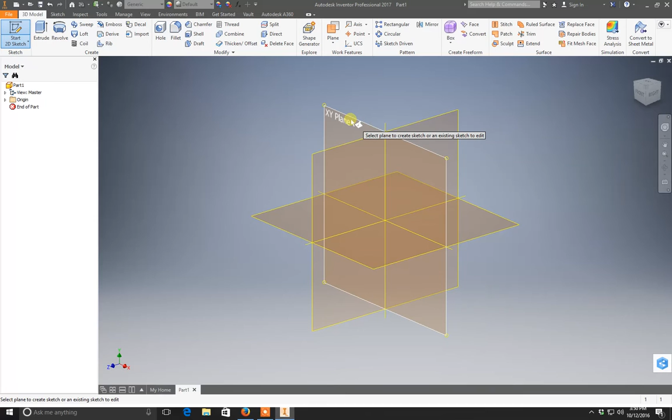Alrighty. So hopefully most everything should be basically the same in this version as your version. This is Inventor 2017. But we start by clicking 2D Sketch up here. We click on which face we want to draw on. We'll click the front face or the XY plane. So we click on that, and we can see from this box over here that we are now facing this plane.

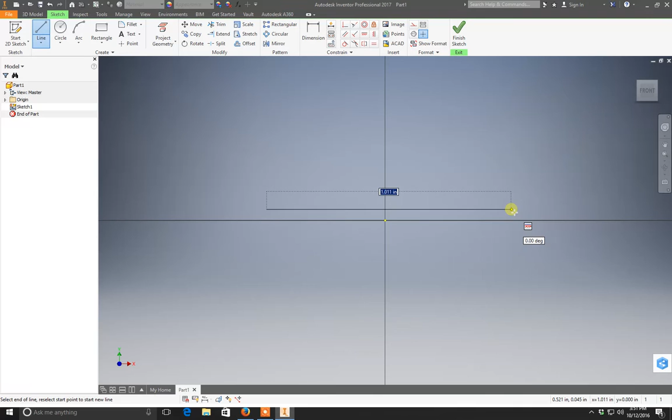Now, how this program might differ from how you would draw a part in AutoCAD or Mastercam is usually it's easiest to just draw the part quickly without having any regard to having the dimensions correct or anything. So this base mount for a shaft looks something like this. Now this isn't exact, and I don't really care too much about being exact. Just that it has the basic shape of what I'm going for.

So if we click F8, we can look at the constraints that Inventor has decided to place here for us, kind of just based off of how we drew it. So the middle point is fixed, and that's always going to be there. This baseline right here has a horizontal constraint, so we know it's going to be horizontal, and this line is parallel to this line.

This line is perpendicular, as we can see here. This line's perpendicular to that line. These two lines don't have any constraints besides the coincident constraints that are shown by these yellow square dot type things. Another perpendicular constraint here. So I click F9 to turn those back off.

First thing I'm going to do is constrain the middle of this line to this point right here. It's kind of to set up some symmetry. So I click on the coincident constraint right there. I go to the middle of this line, find where it has that green point, click there, then click on that point, and it moved the center of that line to my origin, which is where I wanted it.

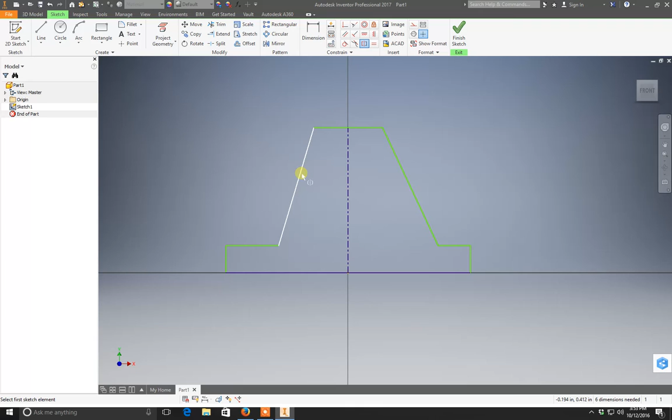One more thing, we will click on the symmetry constraint right here. You click on the two objects you want to be symmetrical first, and then you click on the center line to make them symmetrical. We could keep constraining these other lines to be symmetric, but I believe that based off of these two lines being constrained to the middle and these lines being symmetric, everything else should be already symmetric.

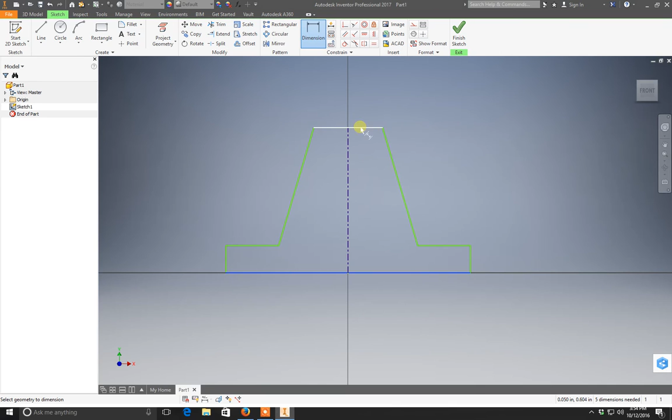So the next thing we'll do is start adding in some dimensions. So first, the overall height of this thing is 1 3/4 inches, so 1.75. And you'll see as I enter that first dimension in that it scaled the entire thing. Next thing we'll do is right here, that is 1/4 inch.

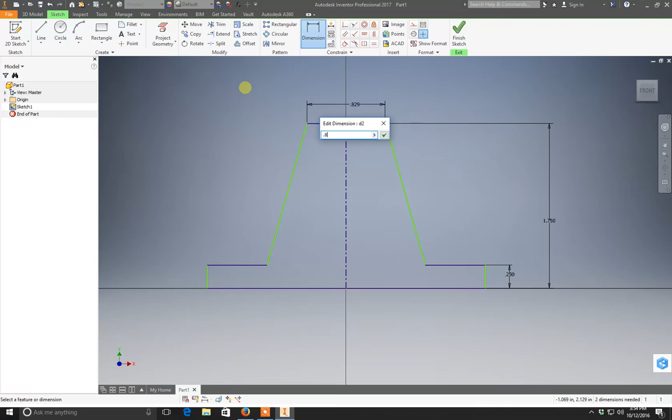And then I'll constrain these 2 points right here. So these are the points that I measured when drawing this thing initially. So this one is 0.875, and between these 2 points is 2.5.

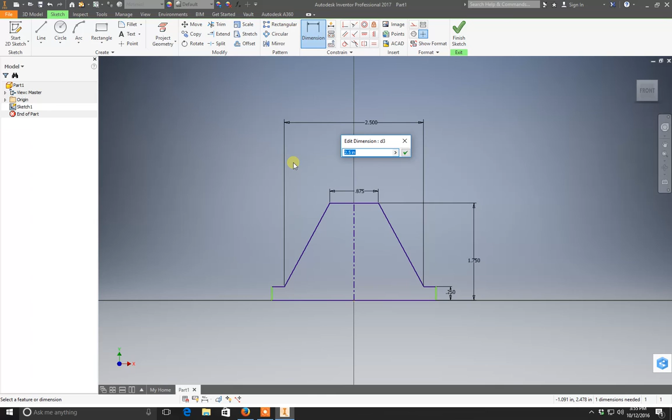Excuse me, that was wrong. Yep, entered the wrong dimension in. You can just click on it there and change that to 1.313. It looks a little better.

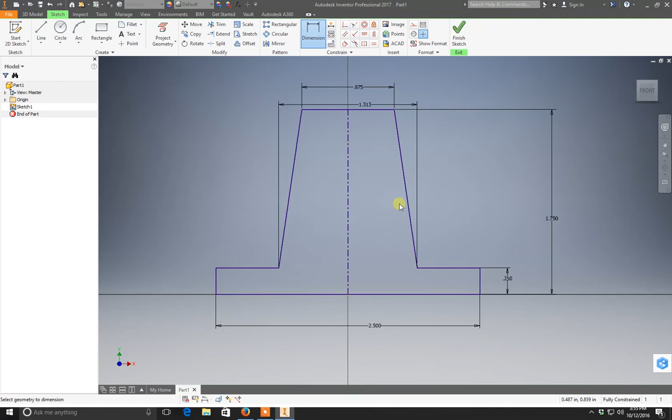And then the distance between these 2 points is 2.5. And you'll see right here we have 1 dimension left, so we know as soon as I add that dimension, we should be fully constrained. So we'll change that to 2.5. There you go. And that looks approximately the shape of how we want it to look.

Next we'll come up here and click on circle. I'll just click some arbitrary point along this line, and we'll make that 0.625. Okay. We have 1 dimension left, so we know that we just need to constrain the height of this.

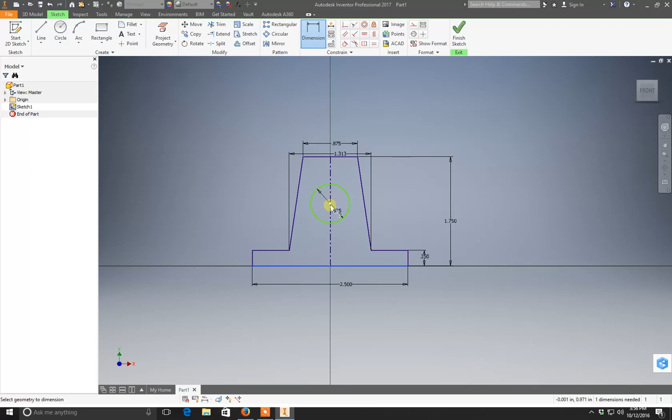We'll just do that. We know we want it to be 1 inch away from the bottom. Click there and there. I'm not sure exactly how I made it exactly 1 inch, but I already had it exactly where I need it to be. Normally I would have entered in 1 inch right there.

Okay, so the final thing we have to do is this slot up here. So I will do that by zooming in right here. Just make 2 lines coming down like that. Okay, we want these lines to be symmetrical, so click on both of the lines and then our center line. And then we will click right here and enter in our dimension, which is 0.0625.

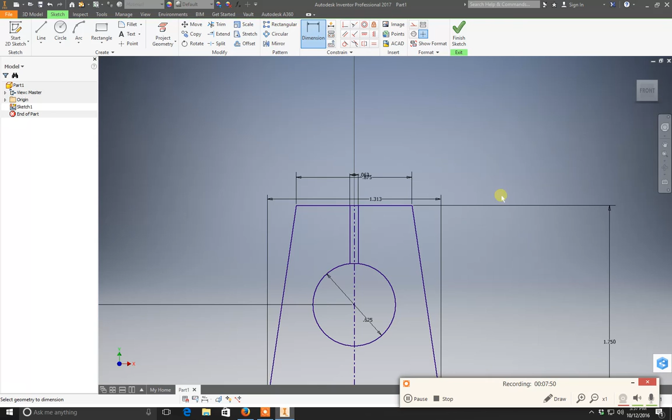Perfect. I'm going to check how much time I have left right here. Okay, about 2 minutes, so I'm going to make this quick. This program has a 10-minute maximum on it.

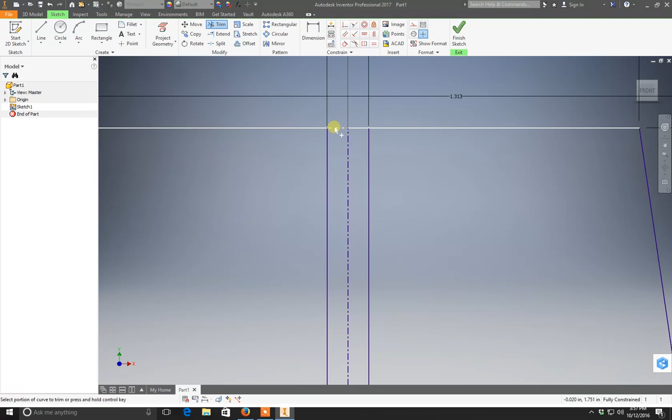Okay, I have all my constraints right here. Now I would like to really get rid of this line. I think the easiest way to get rid of that line will be, well, 2 things we can do. We can either trim it, which for the trim command in Inventor, I just click on the line I want to trim and it does the rest. Although you see that removed a few constraints and messed things up a little bit.

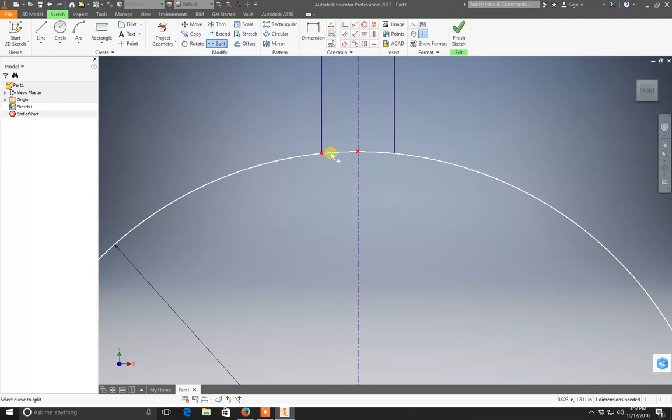An alternative to that would be to click on split, so that is going to break this line up into more lines. So you see, as I'm using the split command, it'll show X's where it's going to put in splits in the line. So I put a split there and a split there. And then I just come over here and hold in Control while I click on these 3 lines and change them to construction lines. And now they are not counted as lines, so if I was to extrude this, the slot would extrude just fine.

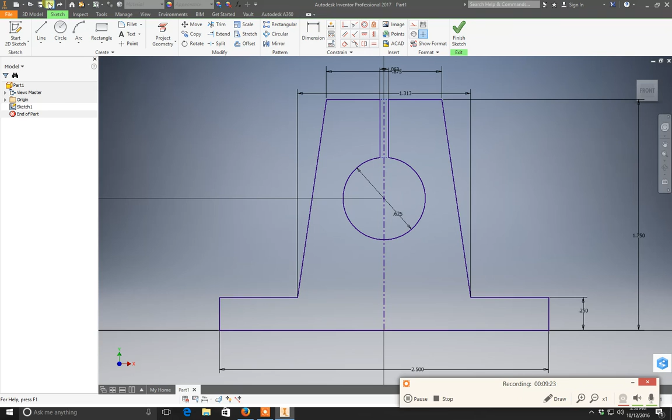And that is it. I can show you how to do the fillets real quick. Once again, as I planned to say during the lecture, I don't typically like to use the fillet command in this just because I can't go back and edit it. It just doesn't work for some reason. So you basically have to get the fillets right the first time.

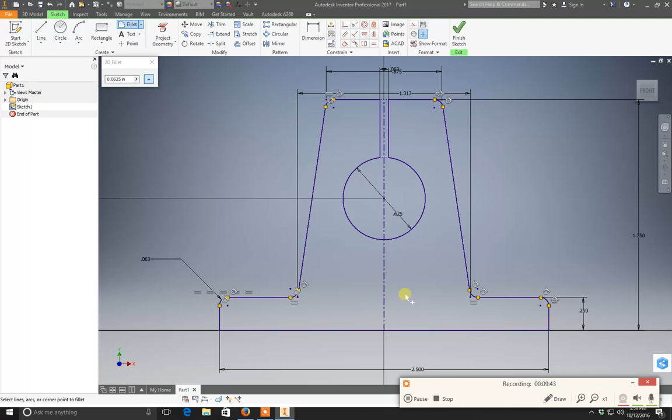So okay, have it at 1/16 of an inch. Click on those 2 lines. You can also just click on the center point, yeah, like that. And there we go. There are our fillets, and that is our drawing complete. So you just say finish sketch, and we would be ready to extrude that from here, as you can see right there. And that is it.